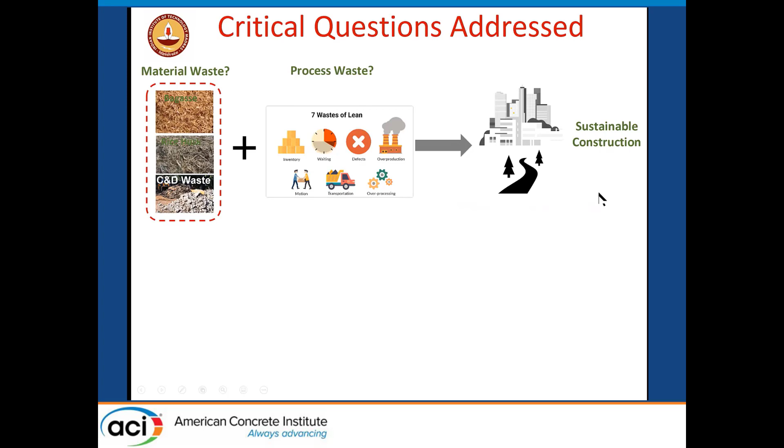So we employ a systems thinking approach where we know the problem. We know that there is a lot of wastage. There is construction process waste. There is deterioration, lack of durability in structures, and we want to reduce the carbon footprint. Therefore, we go to basic scientific research. Beyond just the physics and chemistry, we also want to use computing power. We want to use sensors to understand better the linkages between the material and the structure and its performance.

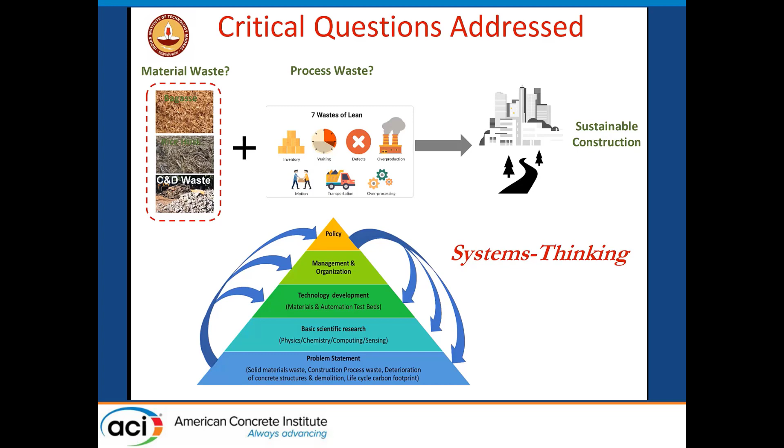For this, we want to develop a technology test bed where we think that we can take materials, known waste or more emerging waste, and see how they can fit back into the construction process. So these could be waste that are coming from the construction industry or from other industries. We take this experience to management. We look at organization and try to formulate policy, which we think is very important, not stopping at what we can do in the lab, but influence policy so that construction really changes.

So our approach is based on the life cycle of the element, life cycle of the structure, life cycle of the material, starting off with reducing waste as the raw material, use more of waste and have less wastage of material. We would like to map waste materials that could be available for socio-economic construction. We look at techniques such as BIM for design and new technologies such as prefabrication and 3D printing in construction. All this we want to make as durable as possible so that there is no repetition, there is no repair, and there is reduction of the raw material used.

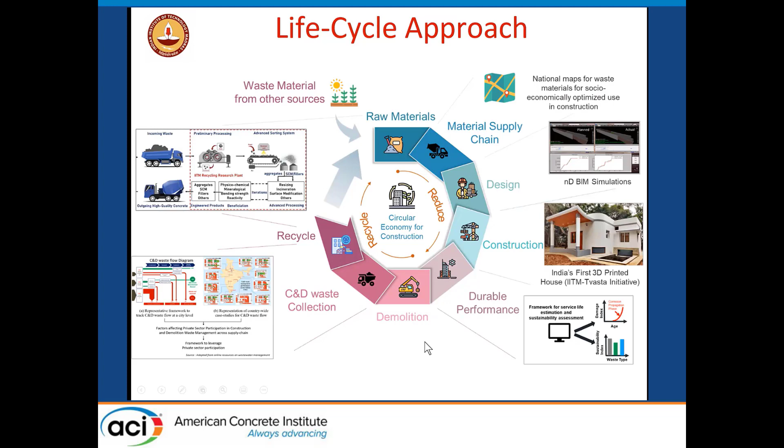Eventually, when we want to demolish, we want to see how much of this material can come back to the structure. So there is a lot of emphasis on the logistics, on the supply chain of the construction demolition waste and make it come back to concrete. Finally, we would recycle this so that we consider the circular economy for construction. For this, we are looking at 4 elements or 4 tracks.

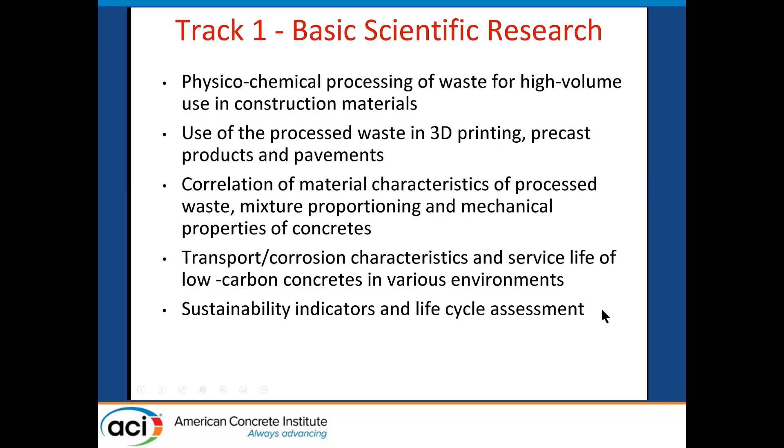The first, as I mentioned, is basic scientific research, where we are looking at physicochemical processing of the waste so that we can go for high volume usage in construction, use this waste in new technologies such as 3D printing, more prefabrication, pavements, and so on. Correlate the material characteristics to the final properties, the performance that we require in concrete. Emphasis is always on durability and service life. We want durable construction at low carbon footprint. And for this, we are looking at sustainability indicators and life cycle assessment.

Some examples of each of these tracks. As I said, we are looking at concrete performance to relate the characteristics of the waste to concrete performance when we use these as supplementary cementitious materials. So we are looking at the pore structure, its evolution, connectivity, linking it to chloride diffusion, carbonation, and so on. We are also looking at sustainability indicators based on life cycle assessment.

One example of what we've been able to do to connect the microstructure to macro performance is this image that shows us the relation between diffusion, represented here as the migration coefficient, and the tortuosity based on electrical conductivity. And we see here this very nice trend.

And at the lower end, higher tortuosity is given by materials which have low clinker, like limestone calcined clay cement, fly ash. And at the upper end, with lower tortuosity and higher diffusion, we find the ordinary Portland cement systems, clearly indicating the reason why we get better durability performance under chloride attack when we have lower clinker and more of

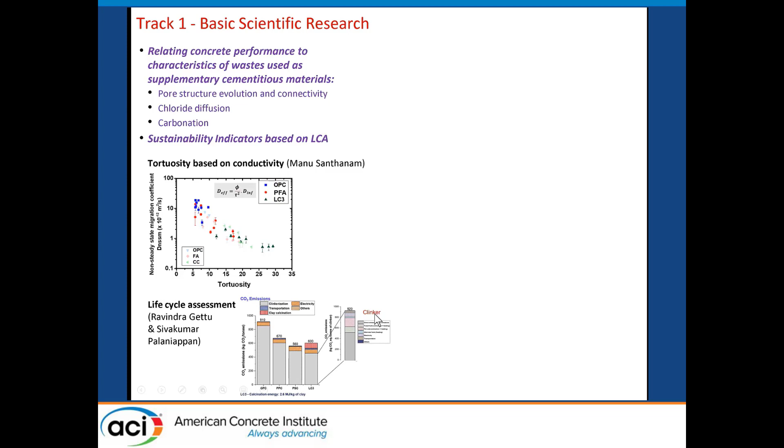supplementary cementitious materials. We are also looking at life cycle assessment. So in this graph here, we see the CO2 emissions, how we have quantified them coming down from ordinary Portland cement to Portland fly ash cement, slag cement, and so on. And this is because of the reduction in clinker. So these data we've had to collect directly from the plants because we don't have databases, we don't have catalogs in India.

The other area that we're looking at more is biomass ash. A lot of biomass is used in India for generating electricity, and this will continue to do so. So we would like to establish a relation between the composition and the reactivity, have a framework which emphasizes high volume utilization, map the agro waste. India has an extensive agriculture sector. So we want to see where the agro wastes are available so that we can use this fruitfully.

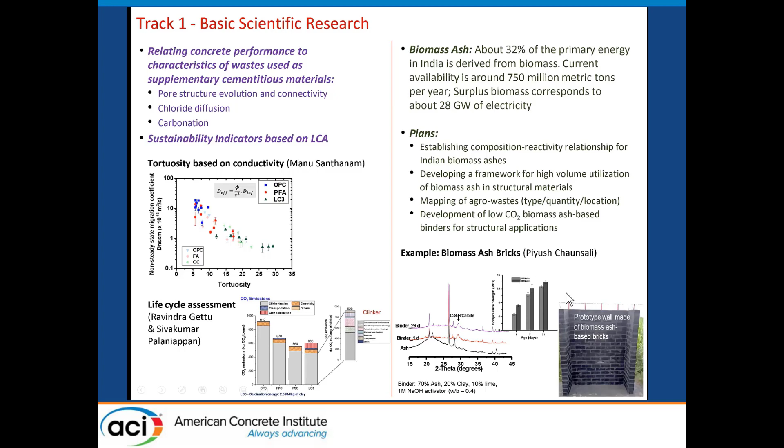We have some example of biomass ash bricks. So here we see a prototype that has come about by combining the ash with other binders, checking the strength and other properties before we go on to a prototype.

The next track beyond the basic research is applied research leading to technology development. So here we are looking at know-how development, patents, and so on, where we are going from the lab to the field. 3D printing is certainly having a lot of emphasis, and we are looking at software and tools, light tools, easy to use software systems that can help minimize waste so that it's not tedious to have the computation and so on. We have to develop sustainability indices that help the user, the contractor, someone who is at the site to compare different materials and choose what is more sustainable and having lower carbon footprint.

So again, some examples. We are looking at durability as a way of achieving sustainability. So sustainability through durability is a very strong emphasizing factor. So we are looking at the corrosion threshold of coated, uncoated steel reinforcement in different concretes, different binder systems. We're looking at carbonation. Not much data is there in temperate and tropical climates. So we're looking at carbonation, service life modeling. Life is very important. We want to have simple models, maybe nomograms, which will help us choose the materials that will give us more sustainable structures.

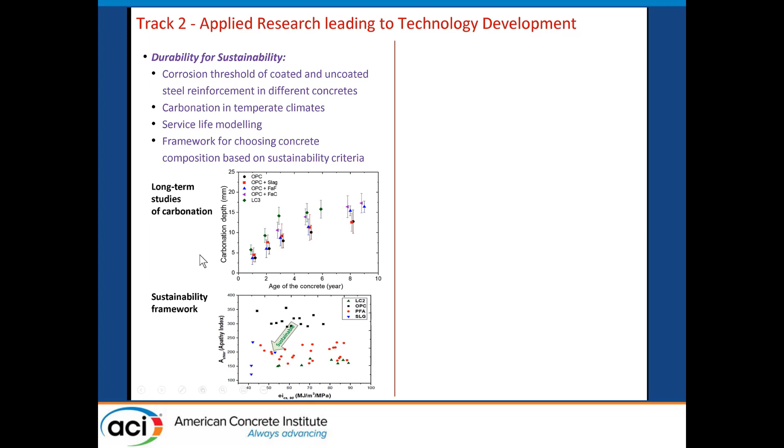We are looking at an easy to use sustainability framework. So here we see a framework based on energy and strength coming in the x-axis. In the y-axis, we have defined something called the apathy index, which looks at the carbon emissions, the carbon footprint, and the durability. And based on this, of all the different choices that a contractor could have at the site, they can choose the concrete that is more sustainable.

On the other hand, we are looking at construction automation. As was already mentioned in this session, labor is becoming difficult to get at the construction site, and we want to take advantage of this situation, bring in more automation, decrease defects, and increase quality.

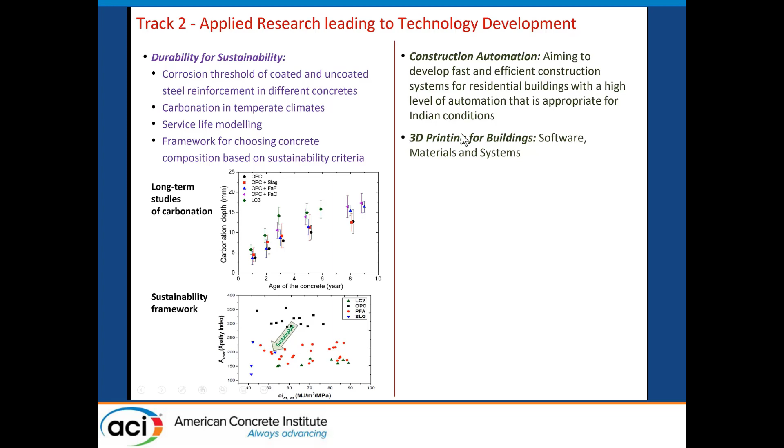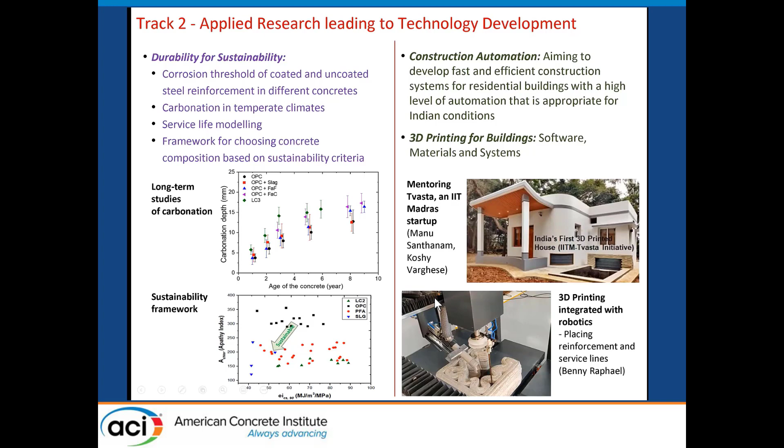So construction automation is also an emphasis, along with 3D printing with the software, materials, and systems. In 3D printing, we are mentoring a startup of young former students of IIT Madras, and this is one of the houses that they have built. We are also looking at integrating 3D printing with robotics for placing reinforcement, for placing the service lines, the ducting within a 3D printed structure. So that is track 2.

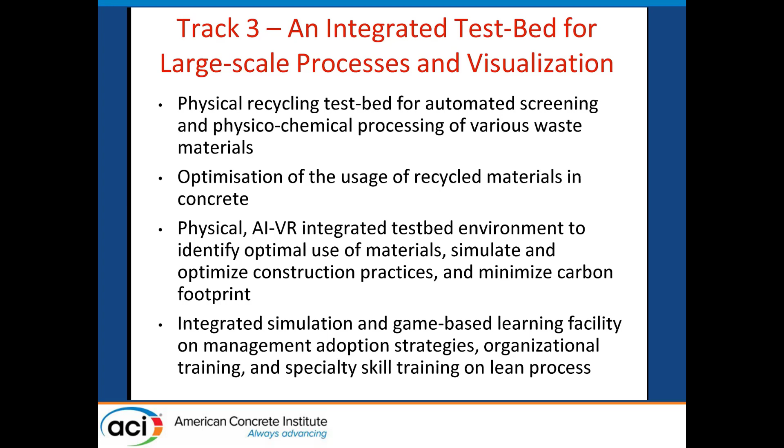Now, track 3 would be larger scale, something like a test bed. So we are putting in visualization, we are putting in artificial intelligence, so that if we encounter a waste, can we have a quick way of testing it out, running through the different processes involved towards final usage of the material in construction, optimizing it. And then we also want to have some sort of an adoption strategy that will come out of simulation and game-based learning.

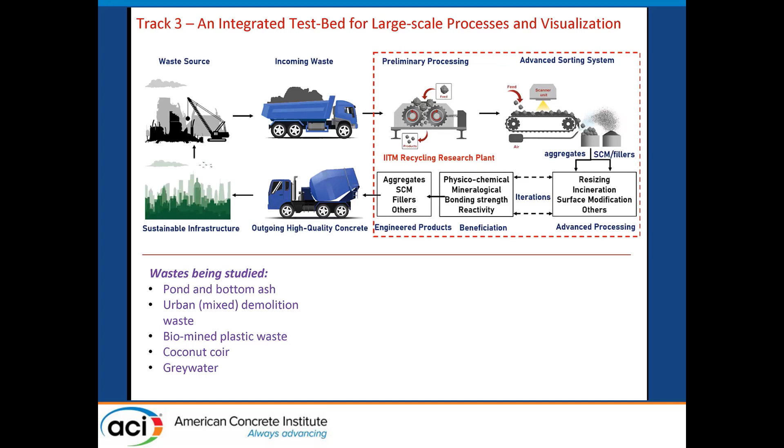India is a thirsty country for water like many other parts of the world, and we feel that we have to use water that is coming from sewage lines, which is usually just let off. If we can put it back into construction, that would be a great idea. So we have some experience already. This is an experience about recycled asphalt pavements used as concrete aggregates, where we take the distressed flexible pavement and go all the way through until it becomes a concrete pavement.

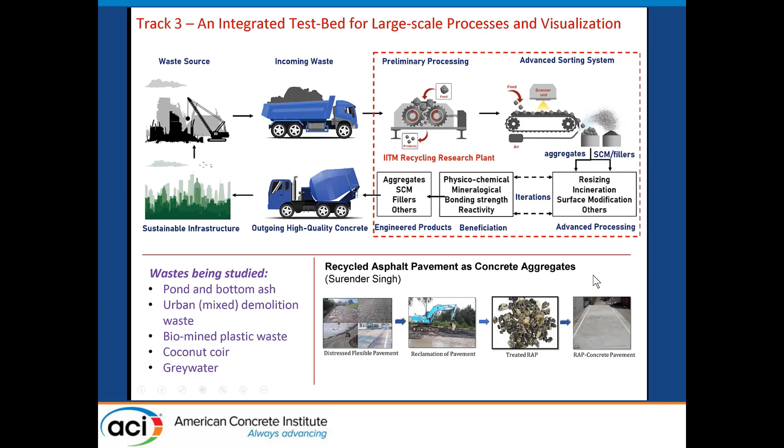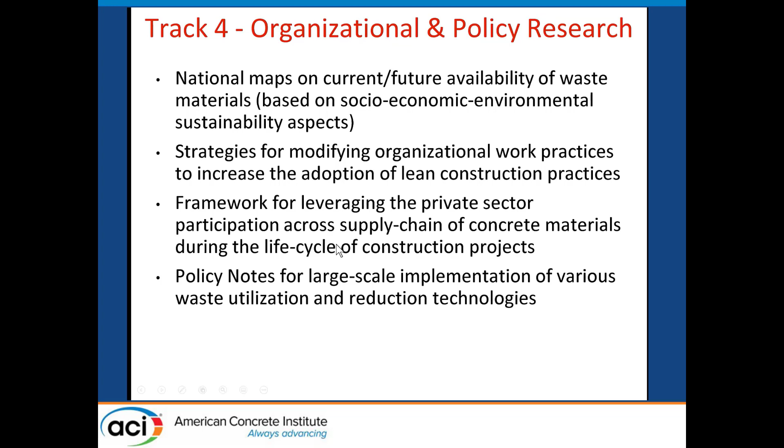The final track is the policy and change in the organization. We strongly believe that just developing a material, developing a structural design doesn't really end up with people using it. So we want national maps showing the availability of waste materials based on socio-economic environmental aspects. We need strategies to modify, to adapt, to adopt these lean construction practices, new technologies, and we need a framework that will include the supply chain and the life cycle, and finally policy. So again, we have experience, there is motivation for doing this.

We need to make significant changes in the project delivery approaches, policies, so that construction industry adopts innovation, quality, and user satisfaction. We want to emphasize the possibility of innovative construction materials, digitalization, automation, change project governance. Contracts, for example, we want to have model contracts, because often we find that when a new material system is introduced, people don't know how to include it in the specifications. Then the infrastructure planning and urban development will start.

Again, we have experience. We have participated in national level committees on public-private partnerships, housing and infrastructure reports, at the state level and at the national level in terms of housing, ports, public-private partnerships, for example, in tollways, and so on. Finally, within this track 4, we want to improve safety. Safety is a major constraint, important aspect in construction projects. Lot of concern. So we want to go to the next level of safety, safety 2, where we want to look at the overall safety, not just the outliers.

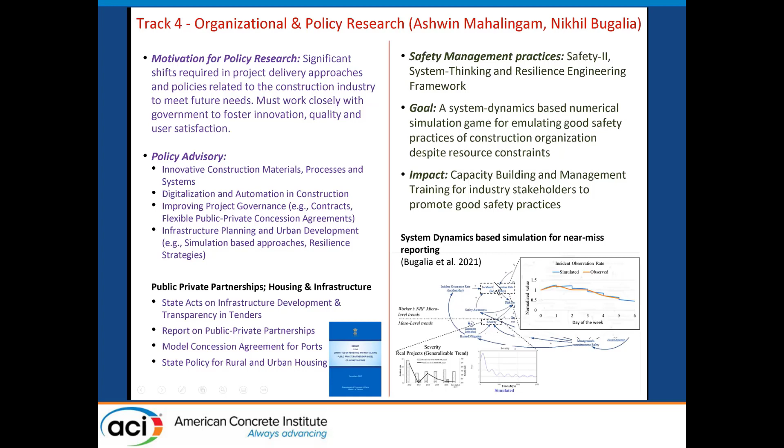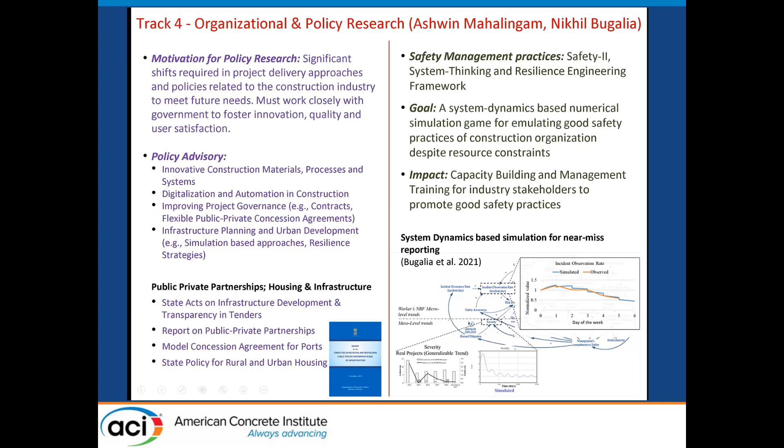Again, an example, we've used system dynamics to simulate what would happen in terms of accidents. So this is a curve showing how accidents start decreasing when there is a systems change made, training made, or other aspects that are changed in the way that construction is done. So these are the different tracks. This is our goal. So I would stop there.